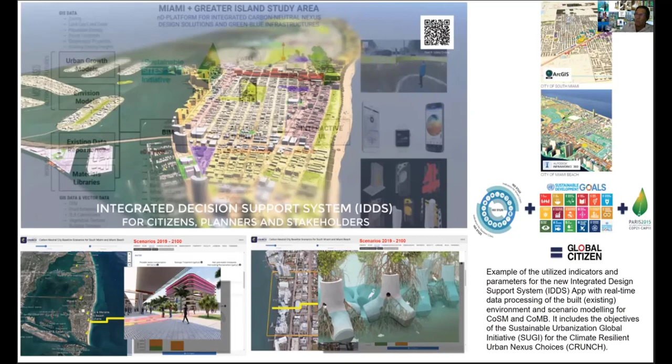All of these artificial intelligence and machine learning assisted research analysis, optimizations and designs are based on approximately 80-year scenarios in which modeling by NOAA, NASA, IPCC, and big reinsurance companies like Swiss Re and Munich Re place much of the low-lying areas of Miami underwater, which you will see later in our interactive app. As we all should know by now, Greater Miami and the islands is one of the most climate vulnerable zones worldwide.

We cannot afford to continue in the same direction. We need new ideas and solutions. This is why we embedded our graduate students and PhD students in these scenarios, because it's their future that will disruptively change the way we live and work.

So in the coming decades, the low-lying areas of Miami are said to be swallowed by sea level rise combined with increased yearly threats of hurricanes, king tides, tropical storms, storm surges, bay contaminations, coral bleaching, and heat waves. I want to show you this slide that has been developed by Miami-Dade County, including the Miami 21 visions that show these scenarios.

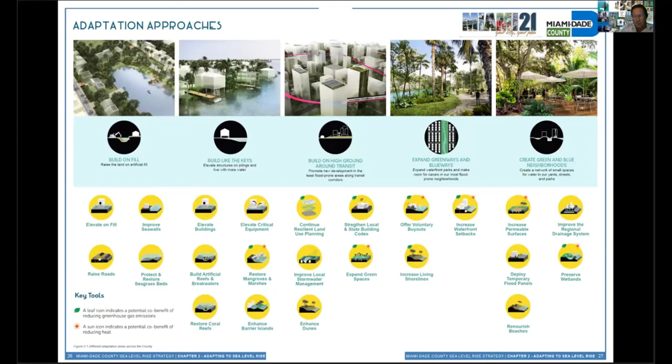And they are co-opted from so many other communities around the world, and it's really helpful now to see that we are going forward with these tools. Now, however, the sea level rise building impacts tool, which is GIS data driven, only gives us ideas about the sea level rise and the building impacts with a benchmark. It's called building impact risks.

So what we did, and I'm changing now my screen and would like to have feedback from Colin. Colin, do we see the IDDS app? Can you confirm?

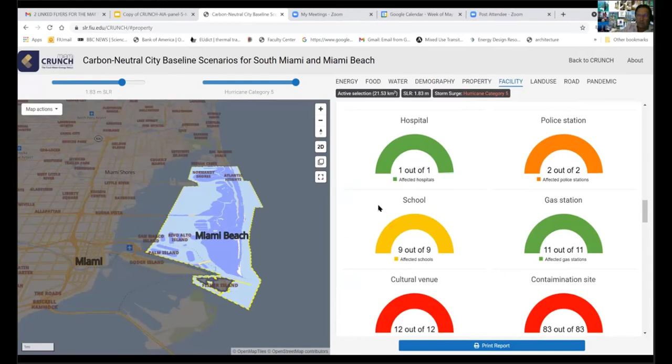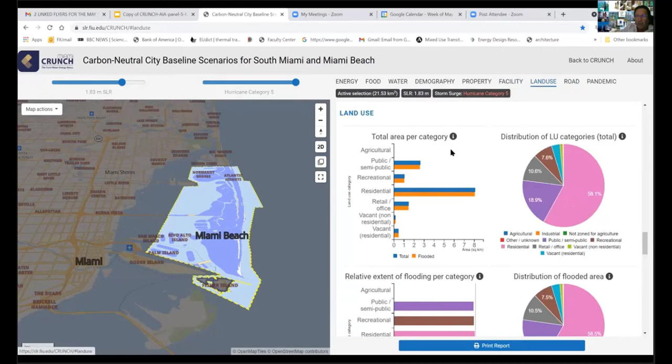In the middle we will include, in our beta version, a sectional version of this tool. What's interesting and different from other tools used by Miami-Dade is that we have here a synchronized simulation based on GIS data, the tax appraisal's office, and other AI-assisted machine learning algorithms like Google AI, to simulate these synchronized scenarios of how the service economy, in terms of roads and land use, will be impacted over time by sea level rise.

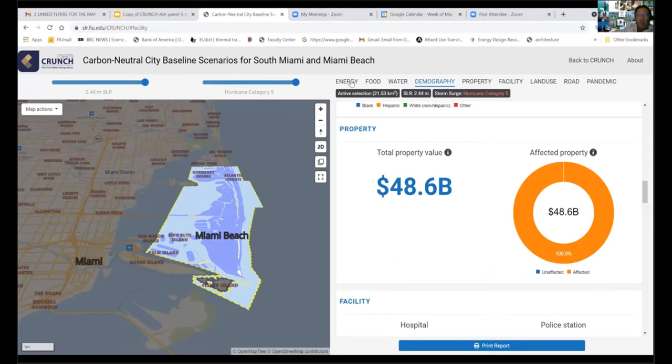We developed both tools for the city of South Miami, which has a sub-award from the Belmont Forum and the US National Science Foundation to work with us to integrate strategies on how to make the city of South Miami, or Miami Beach - we can extend this to Miami-Dade - carbon neutral, on a baseline of the next 80 years.

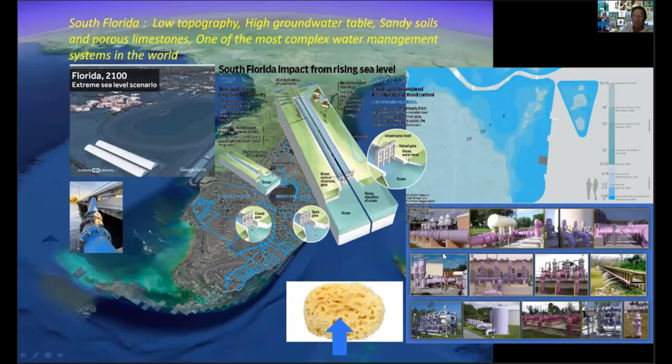And then share. Good. So when we look at this scenario in terms of renewable resource usage, we understand that South Florida, with its low topography, high groundwater tables, sandy soils, and porous limestone, is one of the most complex water management systems in the world. We are kept alive here artificially, with our living and working environments, through a gigantic pumping system that relies mostly on non-renewable energy resources. So our research goal is to use carbon neutral resources to achieve these changes.

Not far from Miami, the strongest hurricane on record, named Dorian, hit the Bahamas in 2019, wreaking massive devastation on the islands and loss of life, with maximum sustained winds of 297 kilometers an hour. The storm surge topped 7 meters above normal tidal levels. For Miami, 2.5 to 3 meters of sea level rise by 2100 is possible and catastrophic, with storm surges up to 7 to 10 meters.

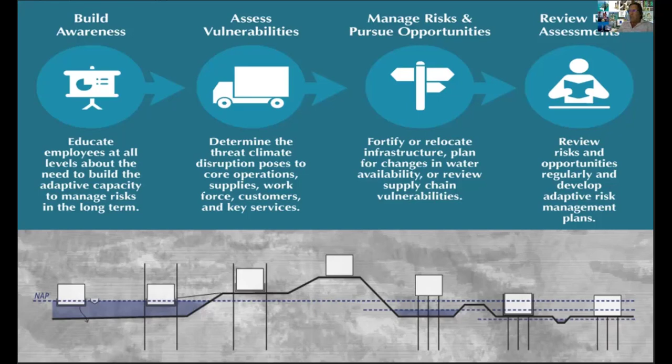Inundations of this magnitude would physically displace some 800,000 to 1 million residents of Miami-Dade County, according to Rees-Swiss and Reminick calculations - we'll hear more about that later from Nadia. Besides, most of the infrastructure in Miami is 80 years old. Out-of-control runoffs, contaminants, and thousands of leaking septic tanks pollute and spill millions of gallons of sewage into the bay yearly. On top of this, the porous limestone rock affects residents' living and working environments daily.

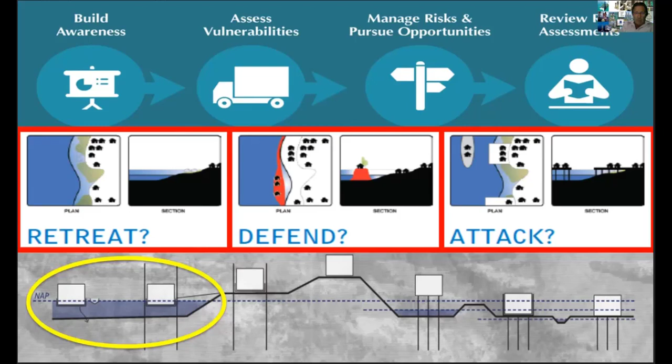So what are the concepts we are looking at here? I would like to discuss this diagram, based on our AI and machine learning assisted research and fitness tests. We're looking at the timeline based on the Southeast Florida Regional Climate Change Compact's sea level rise group, NOAA, IPCC, and the Potsdam Institute for Climate Impact Research.

We already know, based on our research findings and those of others, that around 2040, major parts of low-lying areas of Miami and the barrier islands will be impacted by sea level rise and storm surge in the category of Dorian - 7,000 to 8,000 millimeters, or 23 feet in height - plus the sea level rise itself will trigger a rethinking of building codes, master plans, protocols, and incentives. Also how to build and develop buildings more on stilts, with hydraulic systems, floating or amphibious. The relocation of the population will also be in effect.

In 2070, once these protocols and master plans are embedded and implemented, buildings will be on stilts or have floating city and building structures, and perhaps society comes back to populate, in this case, Miami Beach. That will happen by 2100.

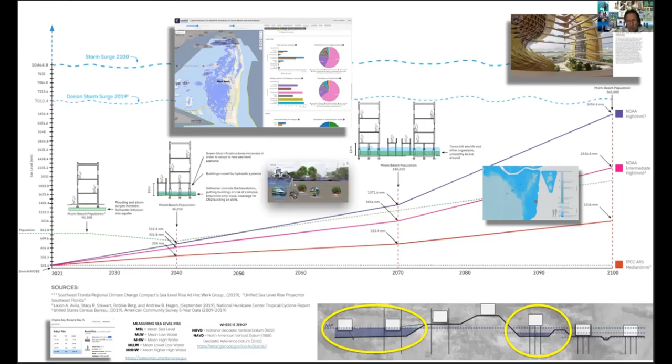These are the scenarios that have been developed by our research team and then imagined and designed with the newest tools and workflows by our PhD and graduate students at FIU, which you can see in the exhibition.

We also have to understand that a storm surge event and sea level rise can go up to 7,000 to 10,000 millimeters, or 23 to 30 feet, meaning we have to think about a future for the next 80 years with green-blue infrastructure and buildings on stilts, floating, or amphibious, to tackle and cope with the changes.

We did a lot of computational fluid dynamic simulations to find out how and where these buildings can be placed for relocation, as you see here.

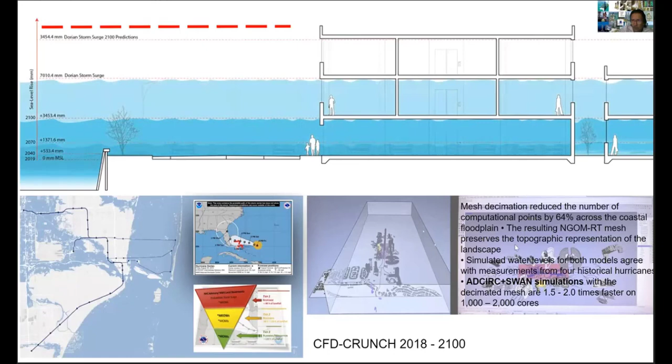These are examples of the geocoded beta app we are developing, which should be available in November this year. Here's a situation in Indian Creek where we looked at amphibious or floating architecture for live and work, on a timeline from now to 2100.

You see here the sea level rise, and this presentation even includes storm surge or Hurricane 5 impacts. It shows that the current pumping system envisioned or partly implemented in Miami Beach or other places does not work at that time.

So we need to look at longer periods of implementation that also deal with bonds and mortgages, etc., as proposed by Reminic and Re-Swiss.

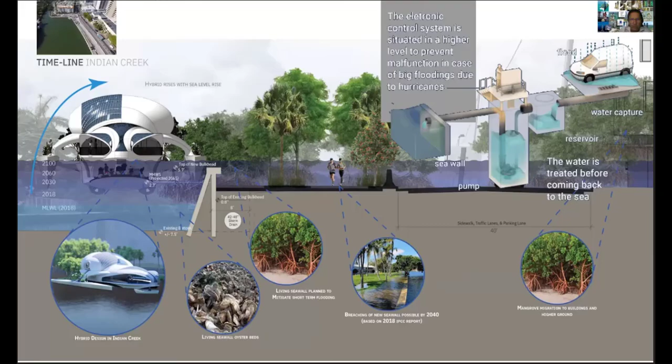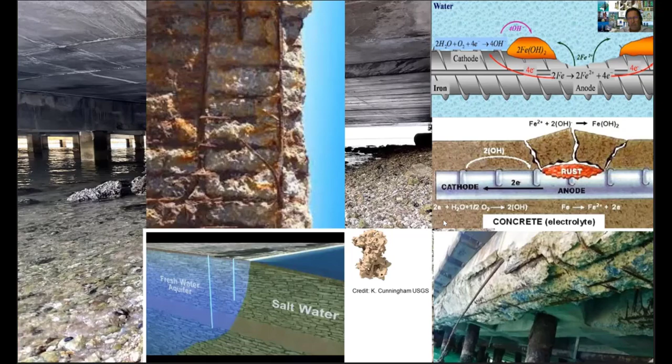Another category we should not forget is that many buildings are prone to saltwater intrusion, meaning we will have extensive corrosion. We need to include those forensic diagnostics and analysis into our app as well, to understand how many current buildings impacted by sea level rise and storm surge will lose their structural integrity. And now I would like to give the word to Consul General Andreas Siegel.

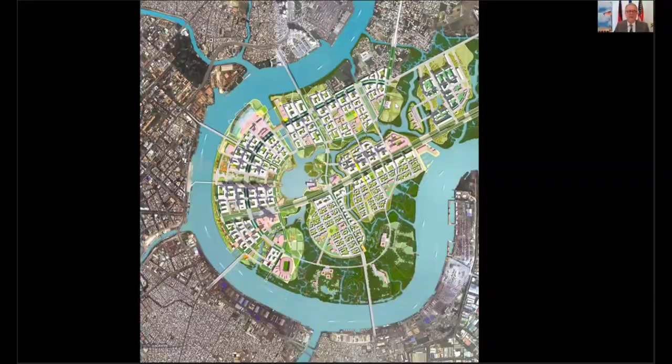I have the next slide. So now the project is, by the year 2025, to have this kind of picture of that area with a number of high-rise buildings, a financial district on the left side of the screen, some residential areas, most commercial areas, and only about 1/3 of the whole area has been left in its green and water-absorbing state.

So there are a number of experts — maybe, is there another slide? No? Okay. So the experts are saying that this will, of course, increase the danger of flooding, even without any storm surge, but even with the normal situation each year.

During my time in Ho Chi Minh City, between 2016 and 2019, I have seen it twice that the airport of Ho Chi Minh City had to be closed because it was flooded. So you can imagine a 12 million megalopolis with a huge logistic challenge every day, and the airport does not function for at least a week. That is really intolerable.

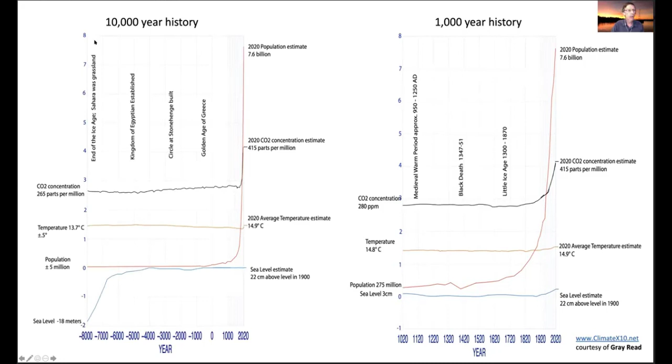And then we'll go to the 10,000-year history, and you can see how our view of things changes. But there's a very important thing that jumps out here, and that is if you look at sea level rise, you see that the sea level rose from about 8,000 years ago, or actually 10,000 years ago, whoops, come back, to maybe 6,000 BC, and then it's been flat.

And this flat period is the length of recorded human history. So as far as we as a species and as a civilization remember, the Earth's sea level has always stayed the same. So we think of land as being permanent. We think of things we build as being there until they sort of crumble of their own devices. We've never had to think about the idea of the sea rapidly moving up or rapidly moving down.

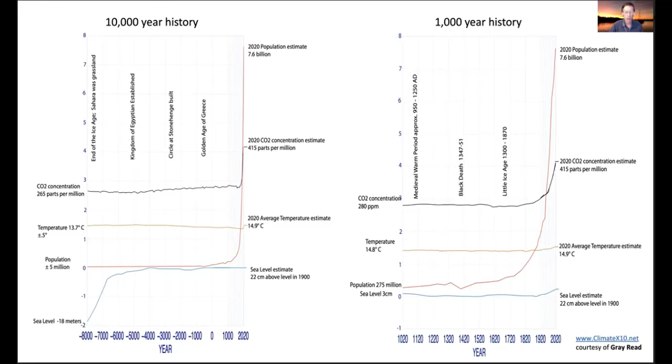And of course it did throughout human history, earlier history, before we began writing stuff down. But since we began writing things down, buildings have been permanent, structures have been permanent, the land has been permanent. This is changing. And it's a real piece of work to get our head around this.

So to do this, let's go back in time 100 million years. This is one of the images you can get. And we're going to take this one apart kind of carefully because this is a very important one. This big red arrow says, we are here.

We are here in terms of parts per million carbon. Actually, this was last year. Now it's up to not 415, but 420. So let's look at the last time our planet had 415 parts per million carbon in the atmosphere. And that's what this dashed red line takes us to. And it was about 22 million years ago, more or less, that we had this much CO2 in the atmosphere.

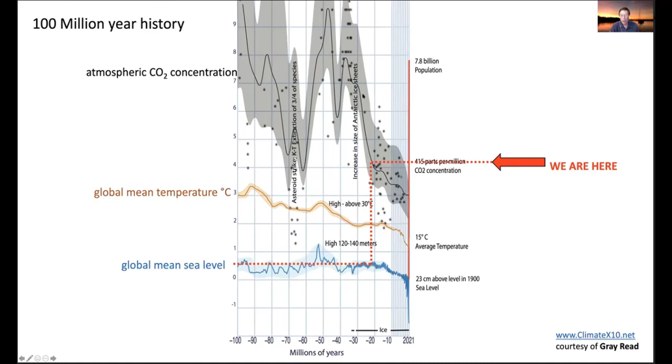And so now we can go down to where the sea level was at the time, and it was considerably higher than it is today. And in fact, it was pretty stable for a long period at that height, back when the carbon was higher in the atmosphere. So let's look at that zoomed in.

What we see here is that sea level rise was about 50 meters above where it is today, and it stayed there bouncing around a little bit for a long, long time. So that's a more typical situation for the planet when you have high CO2, like we have today. So I will bet, and I won't be around to collect on the bet, that we're looking at sea level rise somewhere in the ballpark of 50 meters.

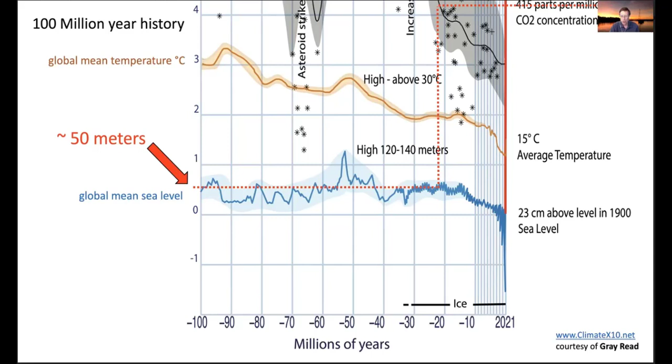Our lovely friend Peter Harlem, who we lost just a couple years ago, did this very nice series of images looking at Fort Lauderdale above and Miami below, as we get different degrees of sea level rise. So I'm going to take you through the Peter Harlem series, and you're going to see what happens with every foot of sea level rise up to 9 feet. Fort Lauderdale, a little lower than Miami, interestingly.

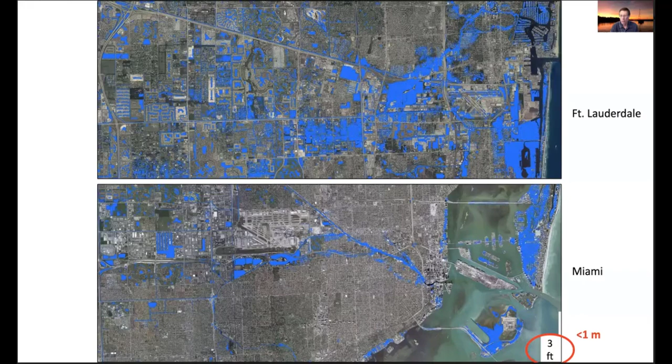At 1 foot of sea level rise, it starts turning wet. Pete did this in blue, but it's not going to be blue, it's going to be brown. 2 feet, 3 feet. I skipped to 5 feet because I lost the 4-foot image.

At 5 feet, Fort Lauderdale's in serious trouble, and Miami is getting carved out. Miami Beach is mostly gone. Key Biscayne is gone, and we're getting a lot of inland flooding. The Everglades is moving in from the west.

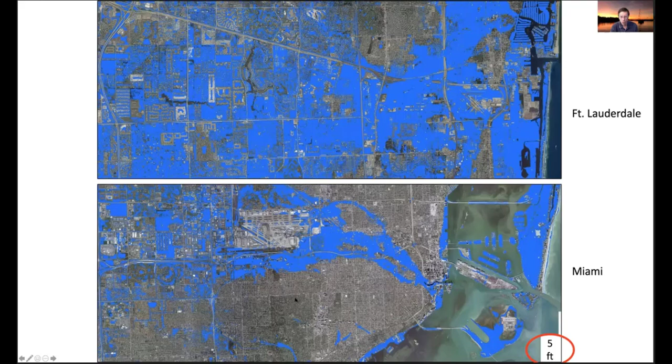6 feet, 7 feet, 8 feet, 9 feet. There's not a lot to save at this point. Fort Lauderdale is gone completely, except for a few little points at high tide. Miami is a series of very small islands.

That's an interesting situation. And if the water were pretty and blue, it still might be a cool place. I am not seeing anything to suggest the water's going to stay blue.

But my friend Harvey Ruvin often talks about sea level rise as being a soluble problem. He likes to say sea level rise can be solved by some kid working in his garage. And the kids working at home, at least the architecture students, come up with wonderful ideas—all kinds of interesting buildings connected with stainless steel catwalks. Maybe you know the price of saltwater resistant stainless steel; it's extraordinarily expensive. So technically within our reach, financially another story.

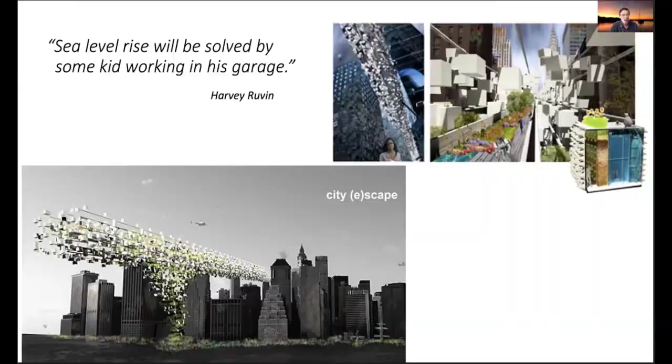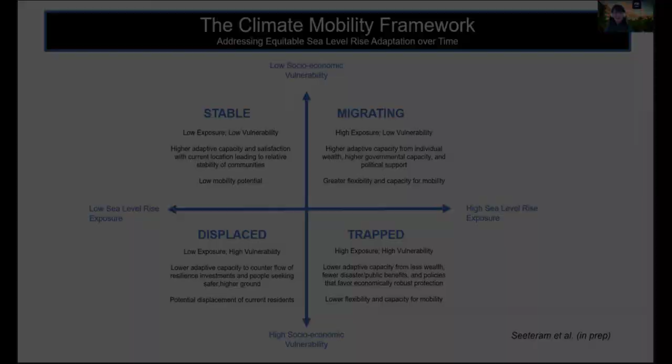On the other side of that vulnerability spectrum, we have what I call the migrating communities. These are people who are in neighborhoods that are highly exposed to sea level rise and people of lower socioeconomic vulnerability. So when you put these two together—a lot of the coastline in Miami, wealthier areas occupying higher sea level rise exposure—you have people who can mitigate their risk on their own. They can look around and say, I can see the sea level is encroaching, I see more flooding, I see tidal flooding, I don't really know that this is the best investment anymore. They can choose to leave on their own. But the research has also shown us that these groups of individuals are also more likely to gain government support, political support for managing and implementing buyouts. So they have just greater flexibility and capacity to be mobile and move away from these high-risk areas.

On the flip side of that vulnerability spectrum, we have what I'm calling displaced communities. These are communities living in low exposure areas to sea level rise risk, but are more vulnerable through historic disinvestment. These areas, because they have not been historically invested in through time, now as capital and people flow in the name of resilience so that people can occupy safer, higher ground, if there aren't protections put in place, this could lead to the displacement of those current residents. This really tries to get at that climate gentrification phenomena. And finally, we have trapped typologies.

People who are living in areas of high exposure are more vulnerable. They just don't have the liquid assets to mitigate risk on their own. There are fewer disaster and public relief and public benefits that flow to these areas, and in general there are a lot of policies that favor economically robust protection, really favor protecting wealthier areas. This leads to these neighborhoods and communities having lower flexibility and capacity for mobility.

I'll just leave this slide and stop there. What I've done for my dissertation is try to apply this framework to Miami-Dade County. That's resulted in a quantitative analysis, and I'm moving into a space where I'm interviewing residents across Miami to really figure out whether or not this is their experience. Do they want to move? What are they thinking about? I'll just stop there.

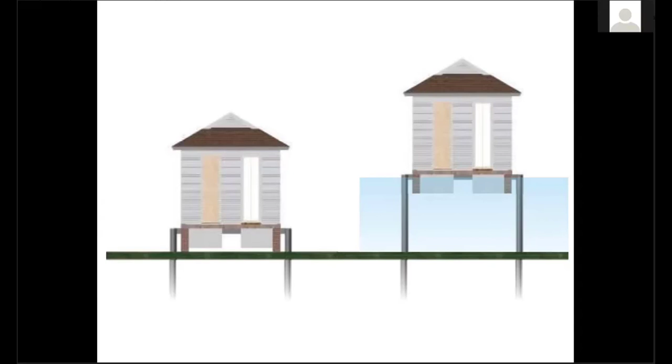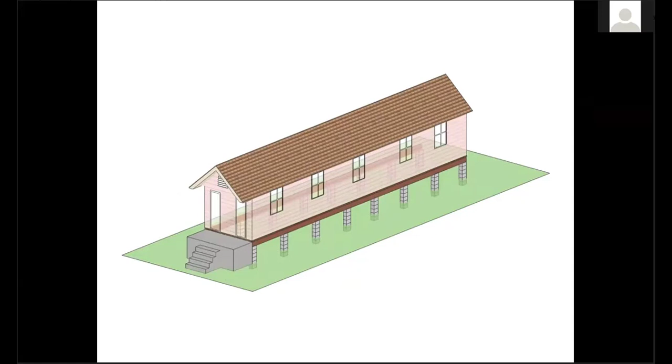So that's the basic idea, and I got started working on that. This is a design I was developing, and I started working with some students. Let's see if my animations are going to work... doesn't look like it. Okay, no animations.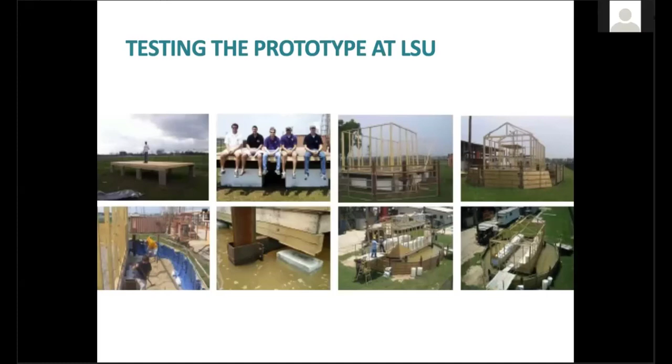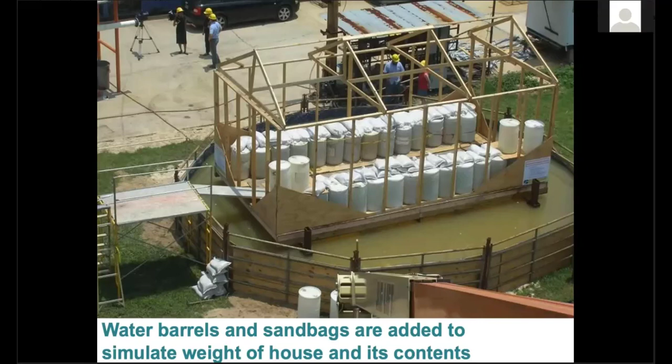So with my students at LSU, we built a prototype. It was a full-scale width and partial length of a New Orleans shotgun house, and we built a flood tank around it and filled it with water and watched it float. We loaded it up with water barrels full of water for the dead load, that's the weight of the house, and sandbags for the weight of the people and furniture, and moved that all around to tilt the house. It was stable, it worked beautifully, we were thrilled.

So in Louisiana, we found in the process of building our own prototype that there was a place in the backwoods that had been doing this for 40 years already. We can see the same house, dry part of the year, floating when the Mississippi River floods this neighborhood. Let me go back to this - average cost of the buoyancy system.

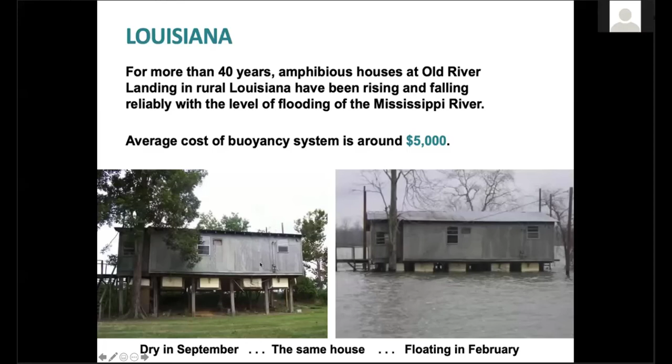I also discovered they'd been doing amphibious construction in the Netherlands, but it's all new construction. I specialize in retrofit - we'll get to that in a bit later.

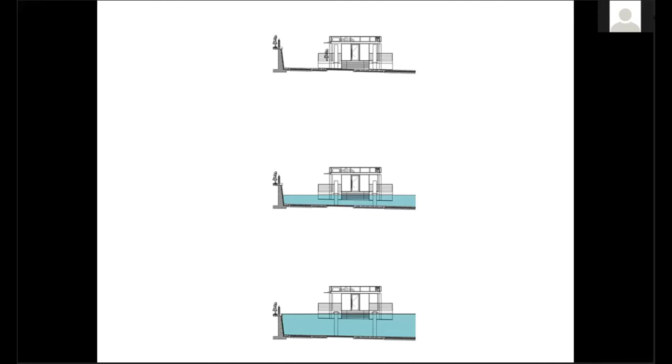A few years ago, I was lucky to get a generous grant to build some amphibious retrofits in Vietnam. So I went to the Mekong Delta, and in An Giang province and Long An province found a community in each of those places where there were two houses that could benefit from amphibious retrofitting.

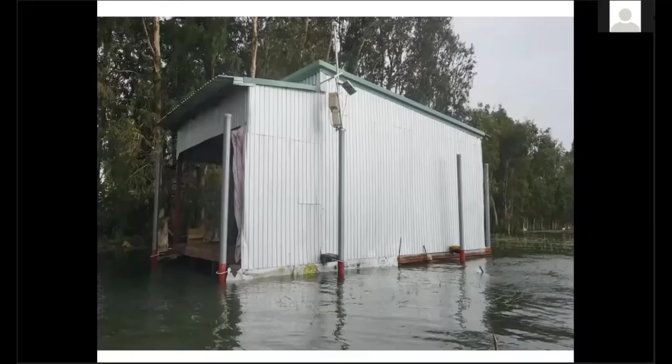And when we came back in October, it was full-on monsoon season, and this is what we found. It was floating. One of my Vietnamese partners had a drone, so we got some lovely pictures.

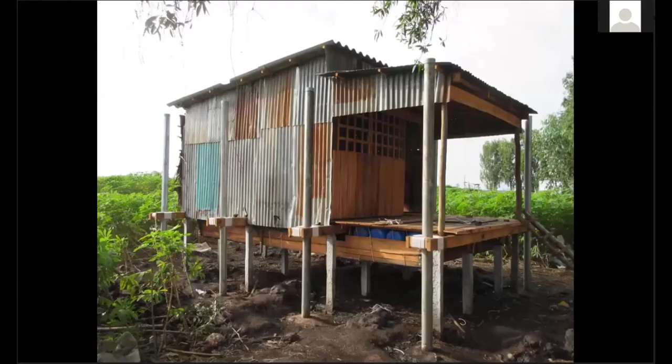This was a neighboring house that was up on this road, and we had to move it down into the field - it had to be moved off the road. So after we moved it, it looked like this, and we used wooden block sleeves. We tried experimenting with different materials and different configurations, and here we are, the drone shots of Lac's house in An Giang province. And now we're moving to Long An province.

We also used the wooden sleeves for this, and we used recycled barrels for flotation for this.

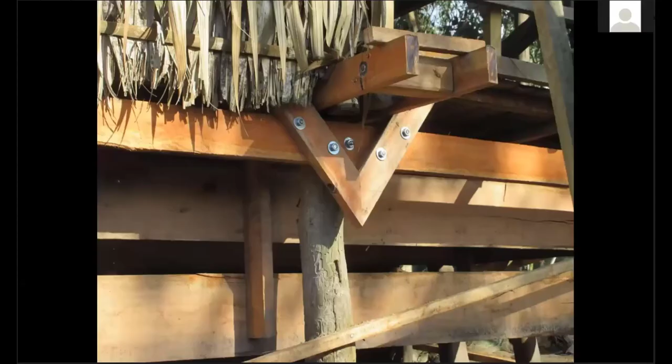We also had an interesting time designing centering devices. We had to make sure that the house would come back exactly in the same place on top of the stilts that it lifted off of.

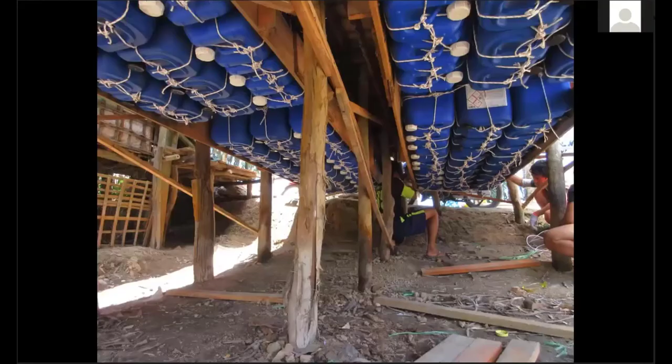And so this was one of our more successful experiments. This is what it looked like underneath with the jugs held up. And the one thing I really wanted to do to make it a whole lot cheaper was to use plastic water bottles.

And so this was my idea for how we would do buoyancy, but the Vietnamese were not buying it. They wanted to see the jugs and the barrels first. Then we finished up that project.

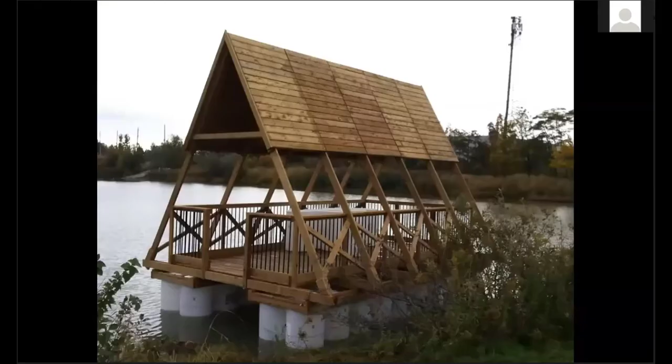I have another project in Canada to develop climate change resilient housing for First Nations on the reserves, because these are people who cannot easily move from their traditional lands. So we built a pavilion on the University of Waterloo campus, and they were also very interested in our looking at the climate differences, because I'd been working in Louisiana, in Vietnam, in Jamaica, Nicaragua, Bangladesh, places like that.

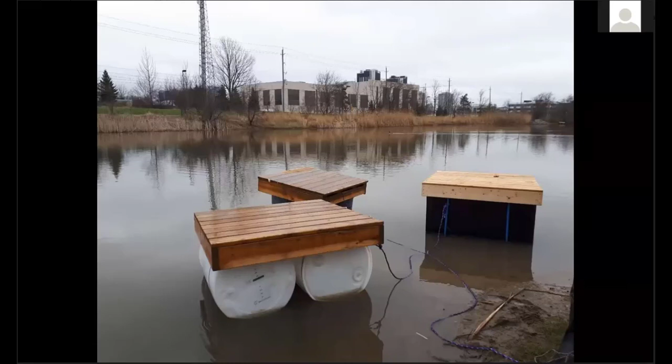So we tried several different types of buoyancy by making these tiny little docks and using different buoyancy materials underneath them. And then we watched what happened when it snowed and when it froze, and when all our little experimental platforms froze in with the ice as well.

I'm going to move faster. Let's go to Nicaragua. This is Malacatoya. The river here flooded, mostly because of anthropogenic change.

And the native people here were forcibly removed to another location, put in houses that were not their own. They were very uncomfortable. They had no way to make a living. They abandoned those houses, came back here. We're living in things like this.

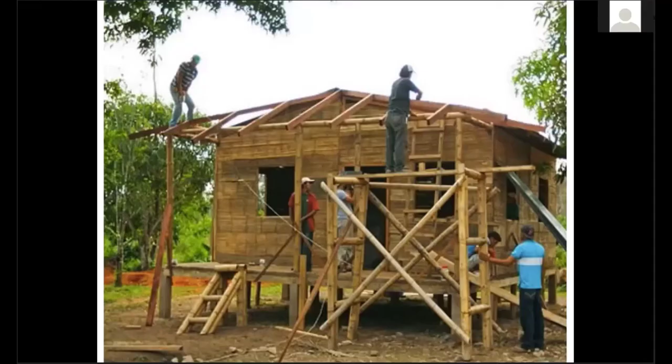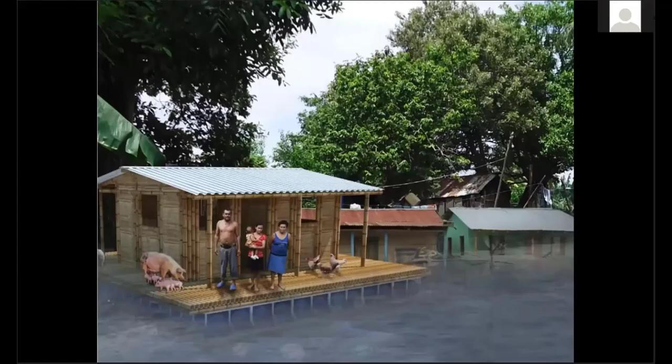I met someone who was interested in building houses like this for these people, and he asked me to amphibiate them. So we came up with this design, and this is a render. We did not have the opportunity to build it, but notice that we accommodate the different cultures.

So in this place, we put a deck around the house so that the people could take their pigs and chickens with them without actually having them inside the house.

Robert had asked me about some of the economic considerations, and I've written a paper called The Economic Argument for Amphibious Construction, and you can find that on my website.

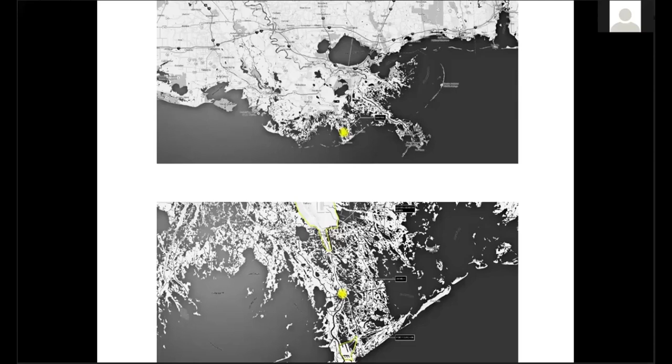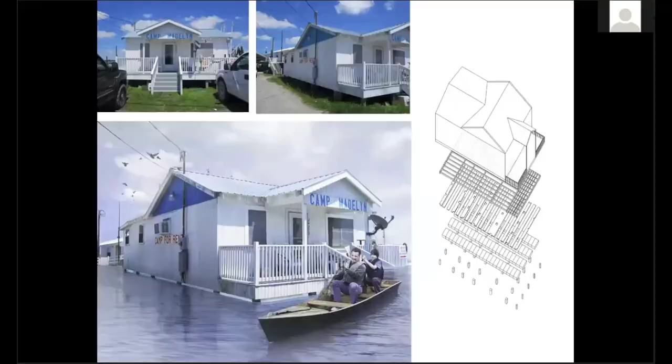But what I'm going to show very quickly is in the southern part of Louisiana, there is a peninsula that is washing away, and we designed an amphibious system for this, and then we costed it out, and we did a loss avoidance study of this, and this is more than you can absorb in this quick presentation, but it's in that paper.

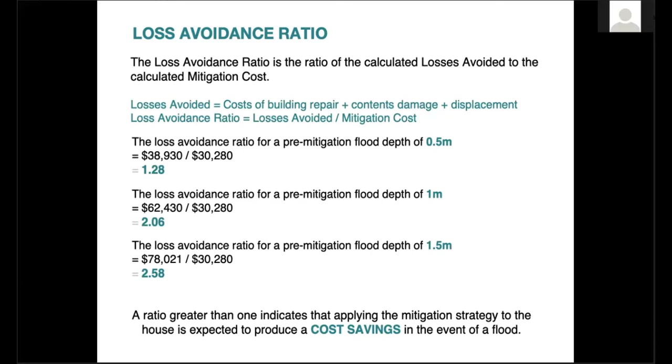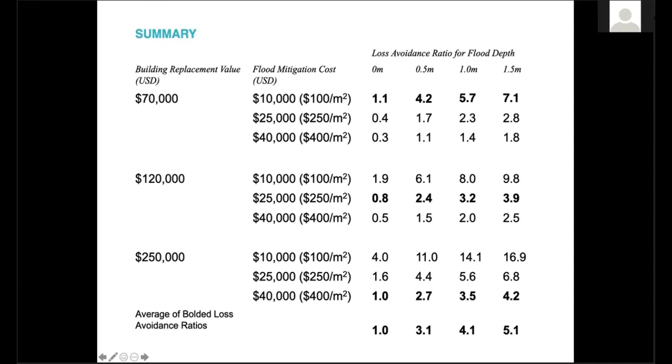Also in the paper is a similar study that we did for central Manitoba for the Pinaymootang Band, and this is the type of housing we were looking at, and we were coming up with very large loss avoidance. This is like a benefit cost ratio in those lines.

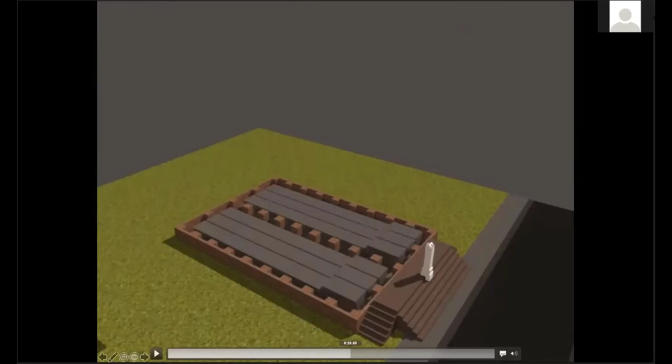I'm going to move this along very fast, if I can. So that's putting in the buoyancy. And now it floats up and down.

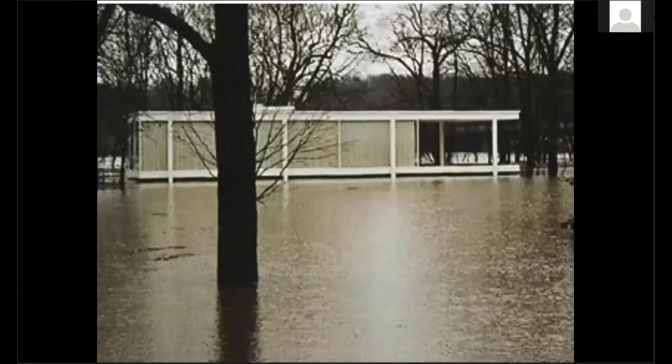Okay, Farnsworth House, last project. Anyone who is an architect knows the Farnsworth House. It's an icon of modern architecture. It's built on a floodplain. It's supposed to be like that, but every once in a while it's like that.

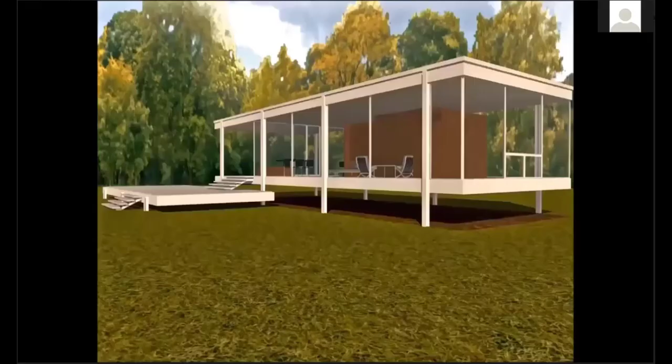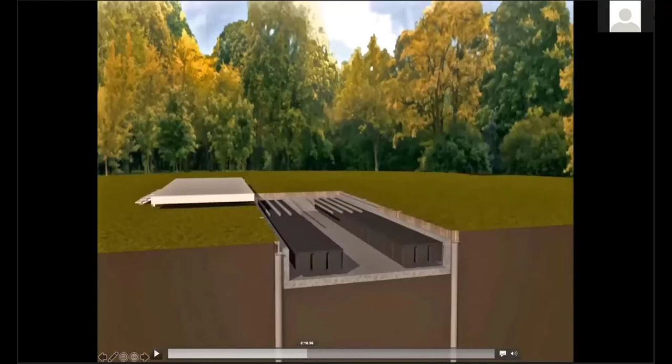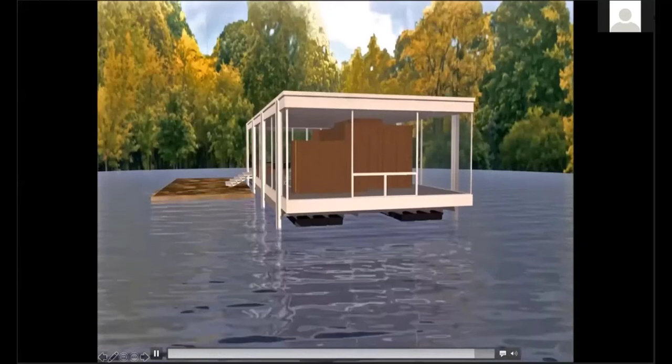Here are some renders, and here is the animation, and let's see if I can speed this one up as well. We put in the buoyancy underneath the ground so that it doesn't block the view, and it goes up and comes back down, and we can still see underneath the Farnsworth house.

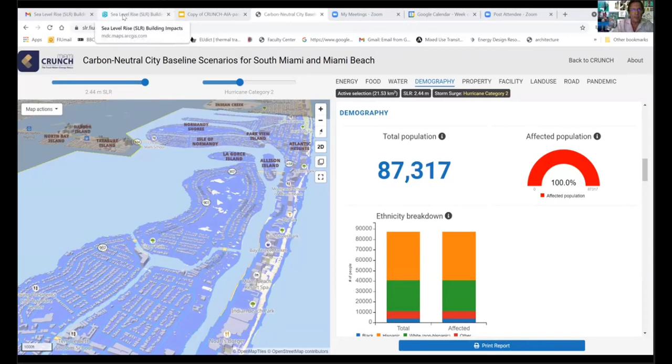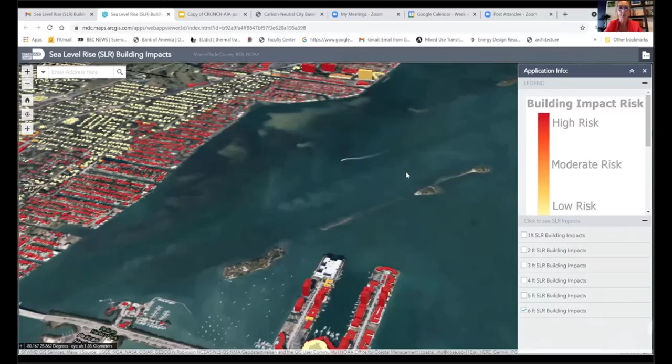Thank you. Perfect. Thank you, Thomas, and thank you everyone for sticking around for my presentation. My name is Rachael Streitfeld, and I actually wear 3 different hats in the conversation that we're having. I am a commissioner, a local elected official here in North Bay Village, which is on the screen.

That red building on the north, on Treasure Island, the northwest corner, exactly. That is my building. That's where I currently own property.

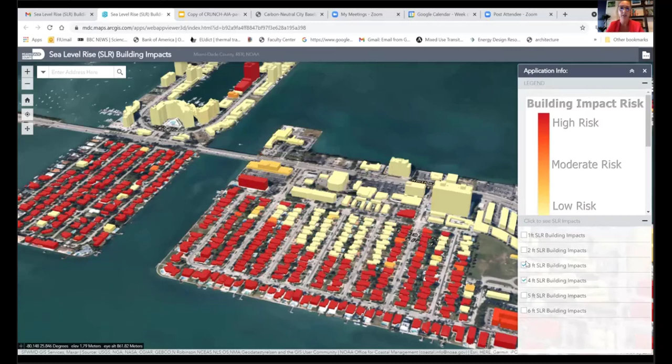So I'm an elected official here. I was elected over the summer. I'm also a land use and zoning attorney, so I work directly with property owners who are currently building or redeveloping properties in Miami-Dade, Broward, and Palm Beach County. And then the third hat that I wear is I'm actually a climate adaptation professional.

Many local governments are taking proactive steps to assess their vulnerabilities, develop digital elevation models, adopt the unified climate change sea level rise projections from the compact, and plan for infrastructure and capital projects accordingly. I am, generally speaking, a consultant on many of those projects from Monroe County to St. Lucie County and up into the Panhandle.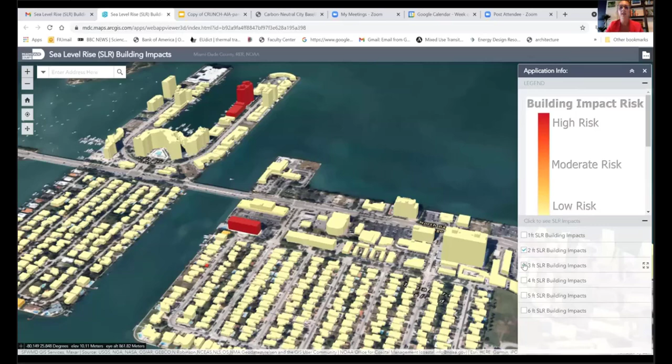So I have a lot of experience working with local governments within the context that local governments have to operate. And I know Phil knows this very well, but I think it's a part of these academic conversations that needs to be more threaded throughout, as we look at these presentations and the phenomenal technology and visioning work done by everyone who spoke before me. We really do need to consider the practical constraints, because local governments have budgets, they have planning horizons, they have politics. That's the perspective I bring to today's panel.

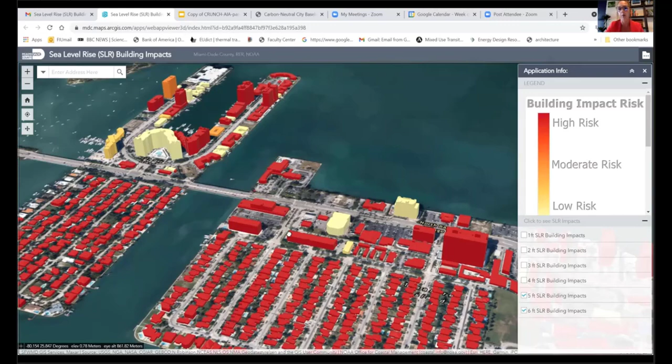Before I go into the nuances of those constraints, I'll share that in North Bay Village, we are obviously a very vulnerable community. We are a small, walkable community of islands in the middle of Biscayne Bay. We were ground zero for the fish kill that happened last summer, and that's because we're right at the mouth of several highly polluted canals. We're right in the middle of the bay, and we have very limited jurisdiction.

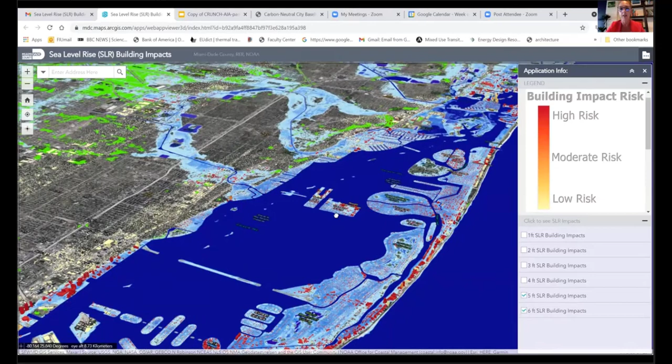So when North Bay Village created its Sustainability and Resilience Task Force in 2018, we said we are going to get a hold of the climate change realities we are facing, and we are going to commit to being as sustainable and resilient as possible. I have to give a shout out, because the volunteer residents who comprise that committee, one of whom, Brenda Krebs, is on the call tonight, have just been invaluable. The way our community has used the human resources and energy of our residents to start combating this issue is really inspirational.

We passed a plastic-free NBV ordinance. We passed the very first Florida-friendly fertilizer ordinance in Miami-Dade County. We have a construction site management ordinance that protects Biscayne Bay from runoff from construction sites, of which we have many, and hope to have many more very soon. We've led cleanups, we had a community-wide march when the fish kill happened, and we're doing advocacy for Biscayne Bay every chance we get.

We are right now getting ready to plan for major stormwater improvements through our stormwater master plan, and we very much expect to get grant money from the state to conduct our very first vulnerability analysis and create our first resilience plan. We've been able to do all of this in the last 2.5 years, and that's a tremendous amount of progress for a small city, with all 5 commissioners and the mayor working together, rowing in the same direction, and not getting into political conflicts about whether sea level rise is happening.

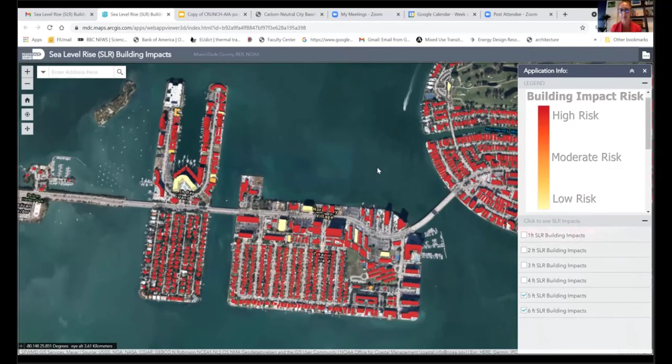This is a conversation that is difficult because our existing homeowners are, for the most part, built slab on grade and they have smaller homes. So the question of privacy and neighborhood character arises, if a new home that's 4 stories high or 3 stories high with an understory is built next to an existing home. I've actually had residents say to me, I don't think people realize that I can see into their shower from my bedroom window.

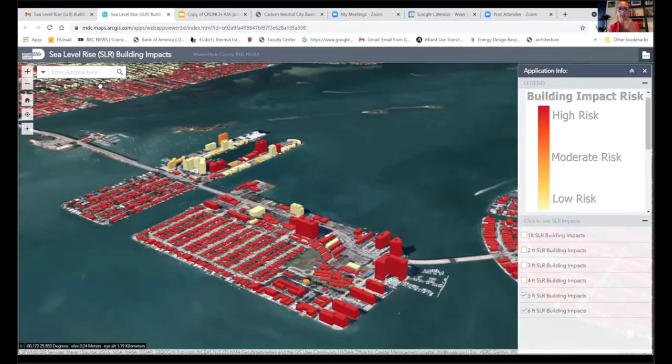This is just one anecdotal example of the type of political conversations I mean - the actual things that are happening to people, not red versus blue, Republican versus Democrat political. I mean, what is the public saying? And there's a lot of misinformation out there.

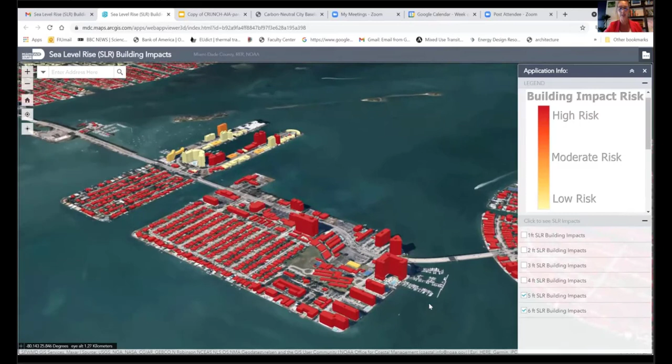So I'm in the business, as an elected official, of trying to marry the excitement and vision of buoyant homes and green infrastructure and the beautiful images that have been presented here of what is possible, with what is immediately practical and what is feasible.

And the last thing I'll say is that the Florida legislature makes it hard for us. At the same time, they give us money to achieve the goals they say they want us to achieve. For example, a bill was passed this last session that severely limits our ability as local governments to assess impact fees for developers building in our communities. For North Bay Village, a community with aging infrastructure and frankly dire issues with our infrastructure, we are going to be relying on these impact fees when new development comes into our community.

And if we cannot mitigate our infrastructure costs in some way, our cities are going to find themselves in even more dire straits than they do today. So I'll wrap up there, and thank you again for the opportunity.

Thank you, Rachel, for your insights from the community in North Bay Village. I'm pretty sure we could continue for another week and turn this into a workshop to answer all the questions that are on the chat. I would like to ask Colin - Colin, what's the policy at AIA? Do we have to finish now at 7:30?